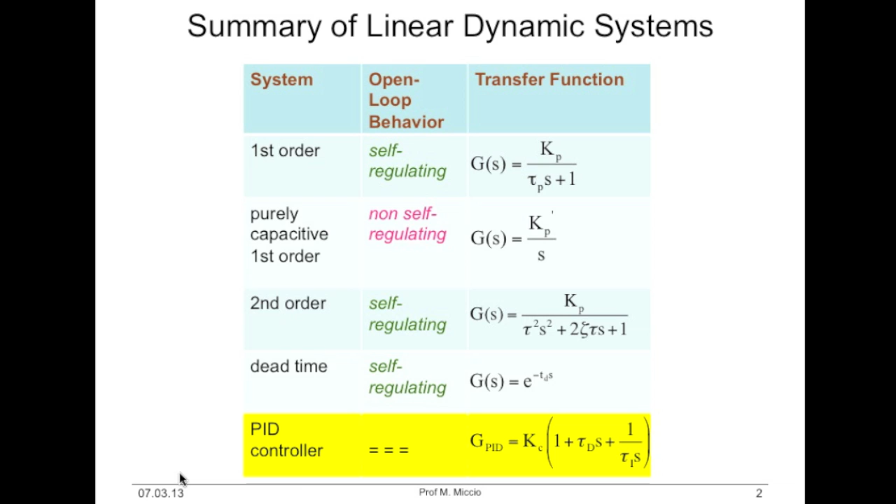The mathematical criterion for BIBO stability, I took this from the book from Seborg, is stated here. A necessary and sufficient condition for a linear dynamic system to be stable is that all the poles of the system transfer function have negative real parts. I have to remind you of the concept of pole. A pole is the root of the characteristic equation. The characteristic equation is obtained by taking the characteristic polynomial, which is just that at the denominator, and setting it equal to 0.

So in such a case, the characteristic polynomial is tau squared s squared plus 2 zeta tau s plus 1. This is the characteristic polynomial. I set it equal to 0, and I obtain the characteristic equation. I solve the characteristic equation. In such a case, it is the classical second degree algebraic equation in S. I obtain two roots. The two roots are referred to as poles. So, a necessary and sufficient condition for a linear dynamic system to be stable is that all the poles, not just one, all the poles of the system transfer function have negative real parts.

Most industrial processes are stable, are BIBO stable without feedback control. So they are said to be open loop stable or self-regulating. An open loop stable process will return to the original steady state after a transient disturbance. By contrast, there are a few processes, such as exothermic chemical reactors, that can be open loop unstable.

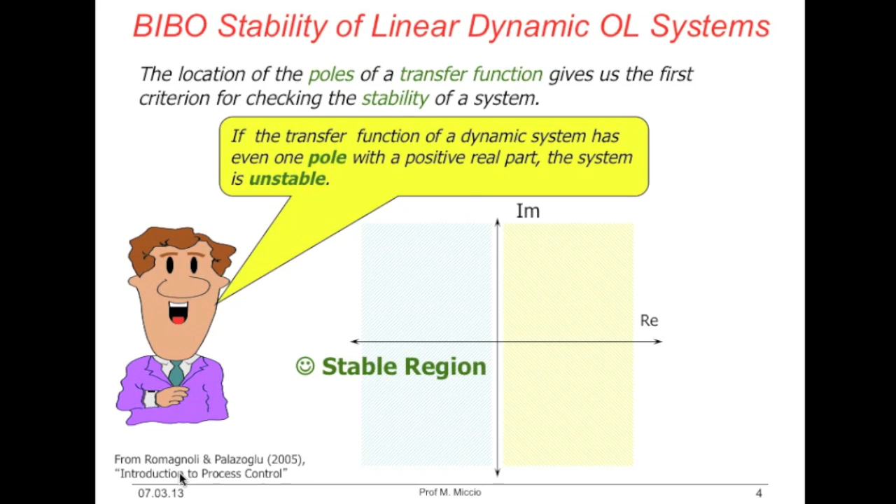Poles can be located on the complex plane, where we have the real axis and the imaginary axis, because in general, poles are complex numbers. So the left half plane is the locus of BIBO stable systems, whereas the right half plane, this one, is the locus of BIBO unstable systems. The imaginary axis is the boundary, and the boundary has special properties. Stable region, unstable region. In fact, we have to define, this is something new, the concept of marginal stability.

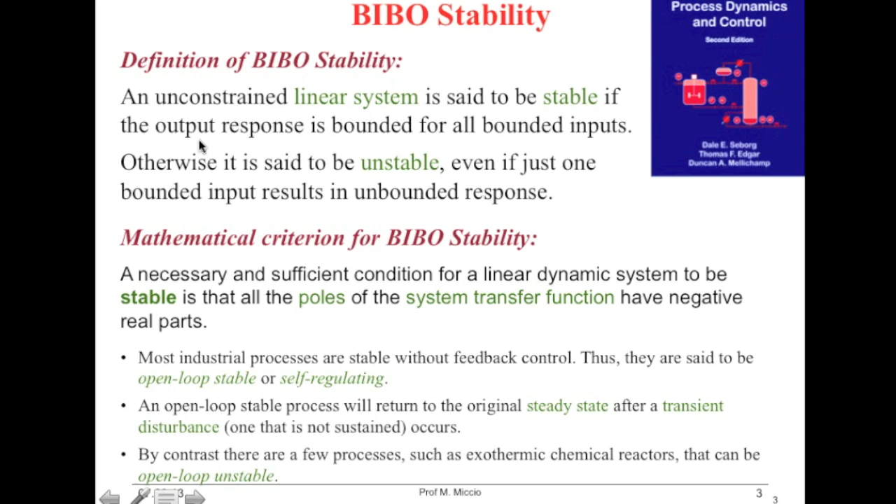An input-output system is defined marginally stable if only certain bounded inputs will result in a bounded output. Look at the difference. Here we are stating that only certain bounded inputs will result in a bounded output, whereas we have said before that for a BIBO stable system, all bounded inputs must result in a bounded output. This latter case occurs when there are poles with single multiplicity on the stability boundary.

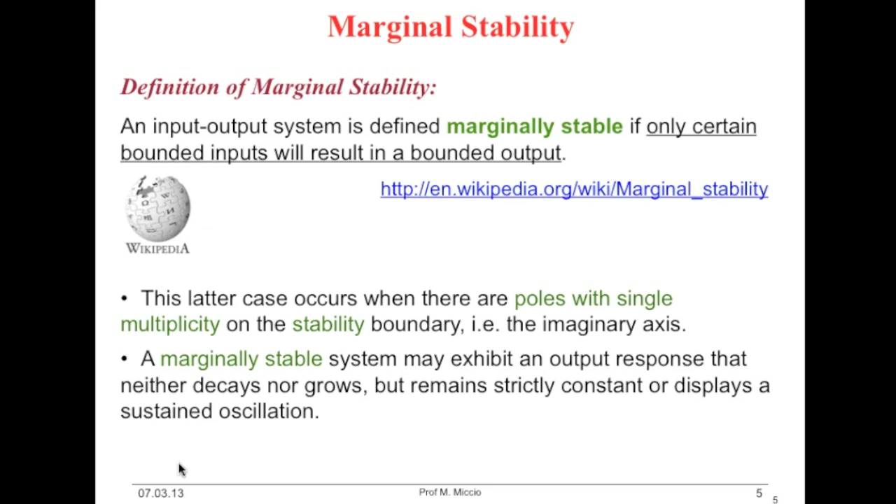A further property of a marginal system is the following. A marginally stable system may exhibit a special behavior in its output response. In that sense, the output response neither decays nor grows. It means that it is bounded. Neither decays nor grows, is confined within a certain interval. It is bounded. Okay, but it may remain strictly constant or may display a sustained oscillation.

So let's be more precise about self-regulating processes. Taking this definition from Stephanopoulos, a self-regulating dynamic process is such to seek a steady state operating point if all manipulated and disturbance variables after a limited change are held constant for a sufficient length of time. So self-regulation is a definition related to the property that the system has to seek and to remain stuck on a new steady state when all disturbances, all changes in the input have been terminated.

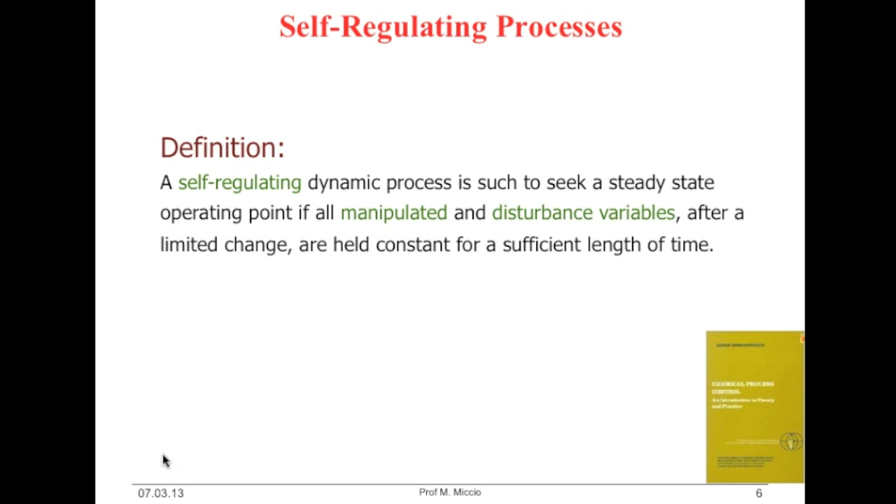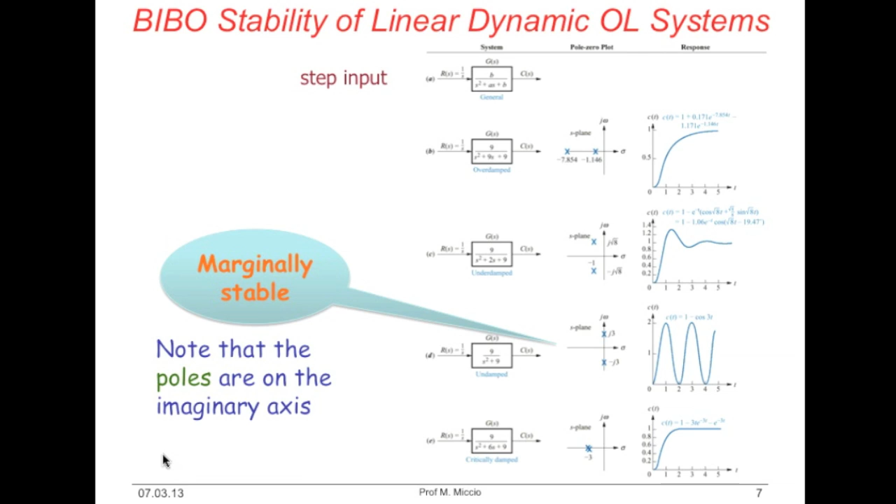Here, although on the screen they are quite small, we can look at the different behaviors of the systems, because here we are considering in all cases a step input, and we are looking at the effect of such a step on various systems. You cannot easily read, but you can easily understand after my words.

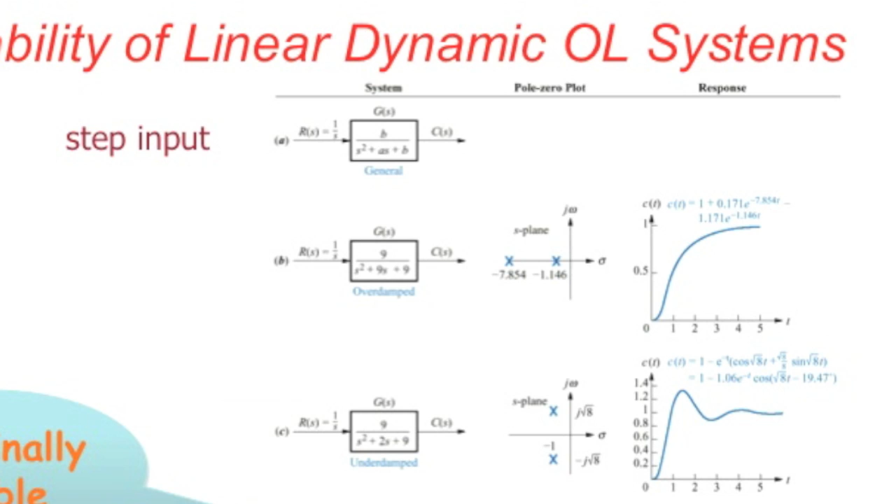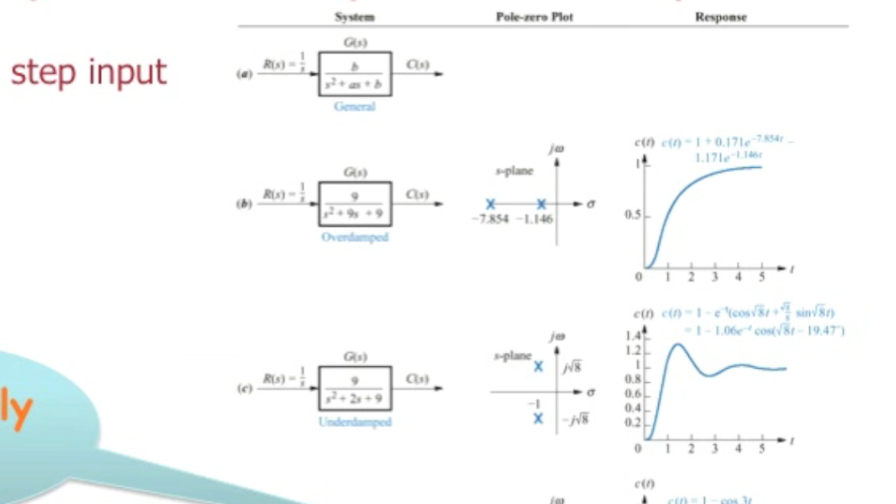Here we have a second order system with two real poles. Look, they are here. Two negative and real poles. So they are located on the negative part of the real axis. This is a BIBO stable system, and the step response is this way. So it's the classical S-shaped response.

It's the sigmoid. In the second case here, we again have a second order system, but we have a couple of complex conjugate poles with a negative real part. Again, this is a BIBO stable system, but the process response is oscillating. You know, this corresponds to the case you have studied earlier of the so-called underdamped system.

Here in the third block, the denominator is s squared plus 9. So we have a couple of purely imaginary conjugate poles. We have two poles with opposite imaginary part, just located on the imaginary axis. In such a case, when you apply a step input to the input variable, you change it according to a step. A step is applied in all cases.

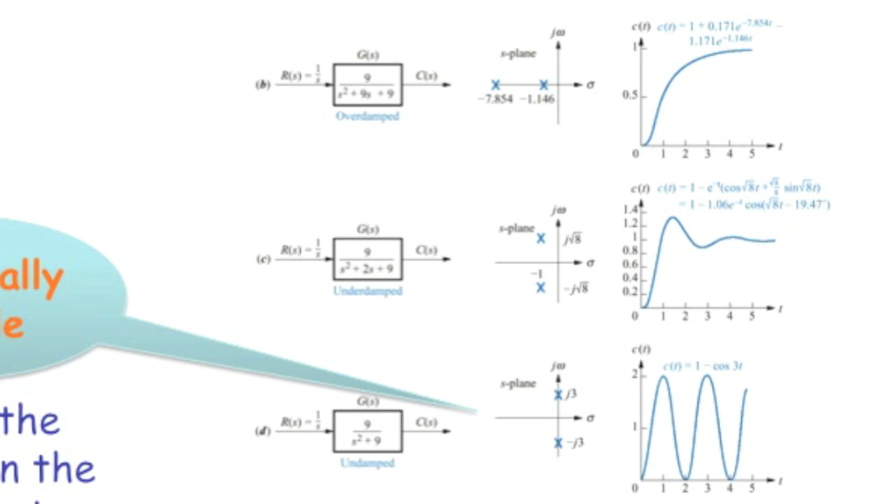You are getting a sustained oscillation. It means that the amplitude of this output response curve remains constant with time, and the oscillation frequency remains constant as well. But the input was just limited, was bounded, and was applied just at one time instant, and not changed anymore. In spite of this, the output is continuously oscillating. This is an example of a marginally stable system.

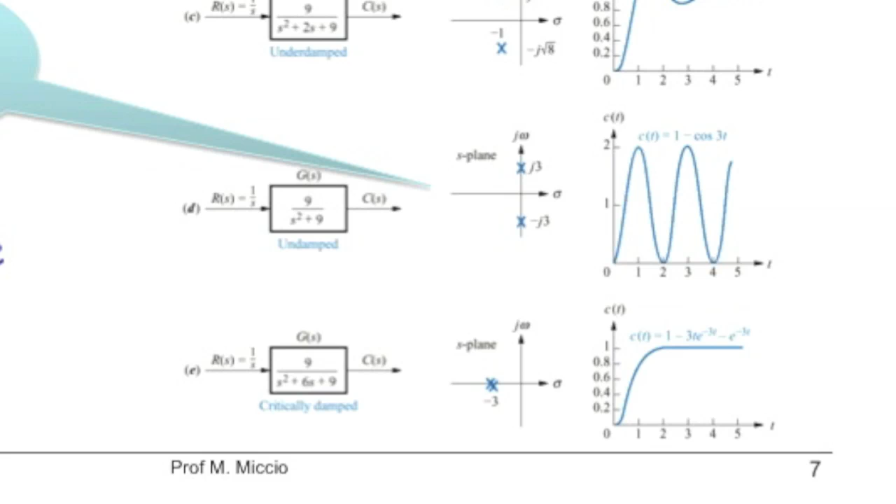And finally, there is the critically damped case. So here we have two poles, both negative and equal. So we have a negative pole with multiplicity equal to 2. Again, this is an example of BIBO stable. So here we have three BIBO stable responses, because the system is BIBO stable, and one example of a marginally stable system. Next time we will start from here.

I reproposed to you the reference cases for the process, but starting from next time, we will consider the process inserted in the classical feedback control loop configuration, in which we have to add a sensor to measure the process variable. We have a reference value for our controlled variable that you know is the set point. We will add a controller. For the moment, we will be focused on PID controllers only.

And the controller is able to determine a control action on a manipulated variable by means of a final control element. You learned that the most common final control element in the process industry is a control valve, a regulating valve. And so now we have to study, but we have time and many lectures to do this, how the closed loop will influence and will perturb the BIBO stability properties of the process taken in the open loop. So we will investigate how closing the loop will heavily affect the open loop BIBO stability features of our process.